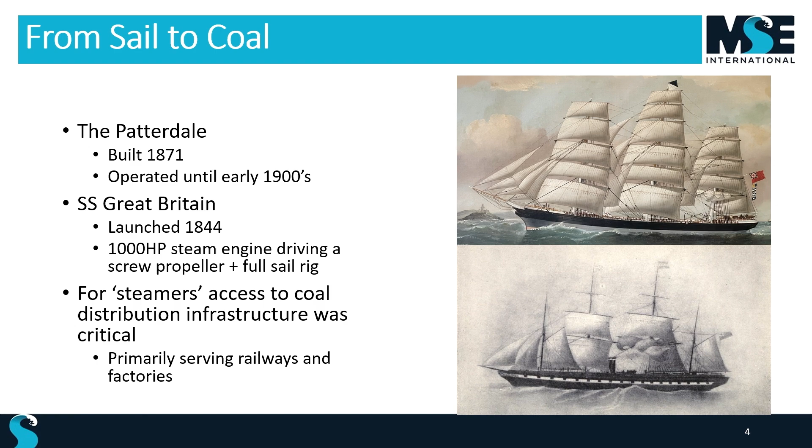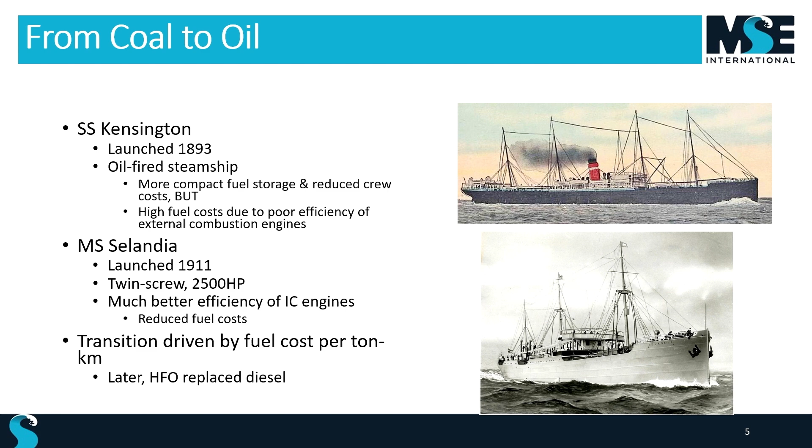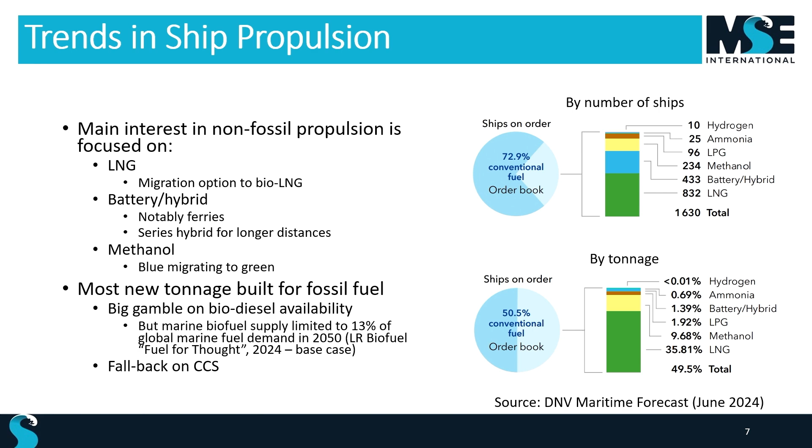But the grey on the top, this bit here, is actually the ships which DNV reckons will have to install carbon capture, because they will be the ones that I've mentioned in the previous slide. They're on order now. They're going to have those ships. They're going to want to use them. So they're going to use them by putting in carbon capture and storage. And we'll look at what that entails in a moment.

This green bit is the biofuel bit. And as you can see, it's quite limited, and it doesn't last long because better solutions appear. As biofuels get really expensive, as they will, you're looking at a better solution. And the bit in the middle here are the new fuels, so-called e-fuels, made from renewable energy, or using renewable energy, so inherently zero carbon, but currently extremely expensive and probably always quite expensive.

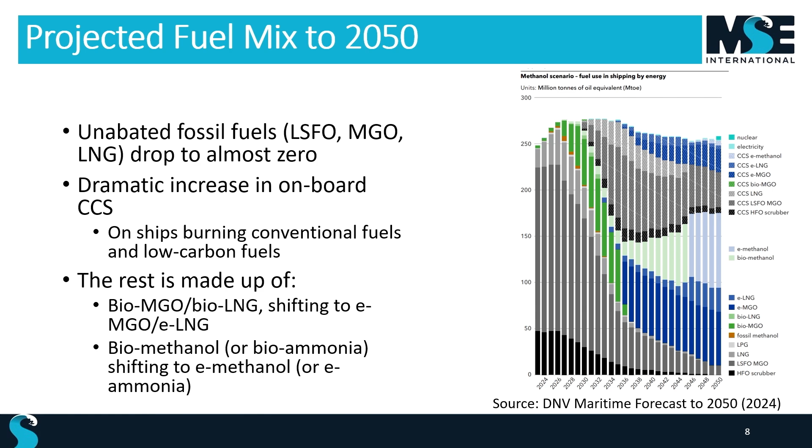Now the biofuel bit needs a little bit more scrutiny, and this is because you never quite know where it's coming from. So if you're buying biofuel from, let's say, Indonesia, how do you know that has been properly generated, as opposed to someone chopping down a tropical rainforest and planting palm oil to make some biofuel and a quick buck? You need to know that, because chopping down a tropical rainforest and planting palm oil is massively damaging. It's massively negative from a carbon perspective. So this really would be a massive disaster if this happened at scale.

So we have this chain of custody which essentially tries to keep track on where the biofuel is coming from, how it's moved around, how it's distributed, and where it's used. So that's a long way of saying we've got to really police this very carefully. And I'm very skeptical, because we know from the fishing sector how easy it is to falsify the paperwork. And I think this could turn into an unmitigated disaster if we're not very careful. So treat with caution, I think, would be my message on that.

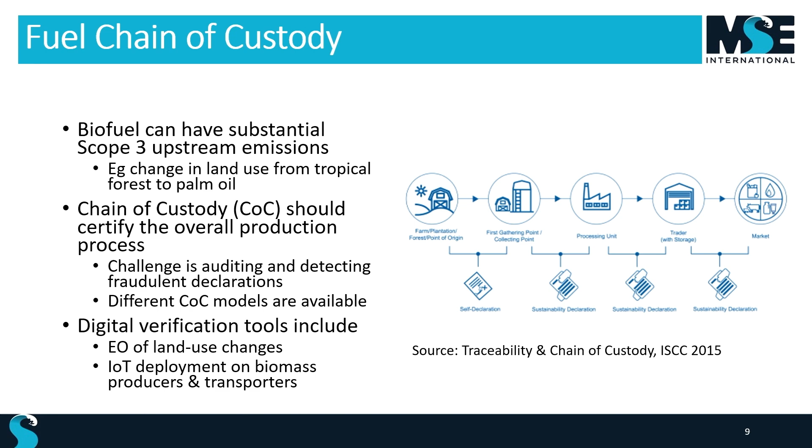Now, coming on to the other option, which is the onboard carbon capture and storage. Just a little bit of word about what this is. So on the ship here, what you've got is the conventional engine, and it discharges its flue up through the funnel here. And what you do is you divert the flue gas before it is discharged, and you absorb the carbon in a chemical carrier, which will absorb carbon, and then you process the chemical carrier to release the carbon, and then you liquefy it to go into this storage tank on the vessel.

When the vessel gets into port, you take the carbon dioxide from the tank, you offload it, you do something clever with it in the port to store it. You then have to distribute the carbon dioxide, and people are looking at re-injecting it and so on.

The problem with it, and it's a big problem, is that it's an incredibly inefficient process. If you just look at the amount of fuel you have to burn to drive the carbon capture, it's about 40% of what the vessel is burning anyway. So this is a massive cost overhead. Then you've got to factor in the fact that the process only absorbs about 80% of the carbon anyway. And suddenly you realise, actually, we're spending all this money and we're gaining a very small advantage. So I think we're fairly sceptical about this particular process.

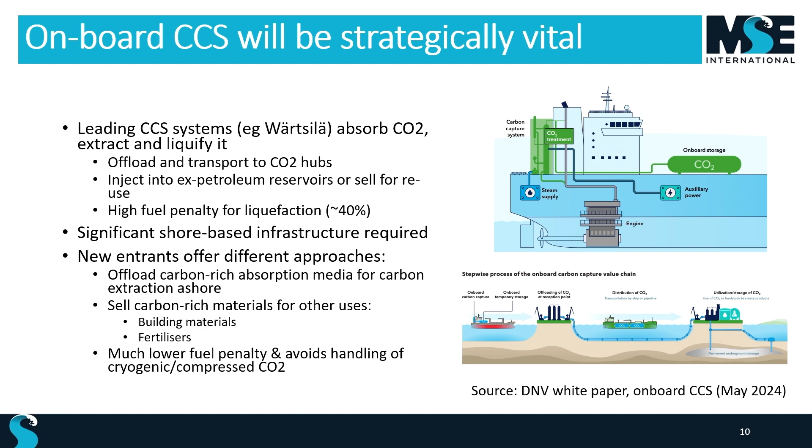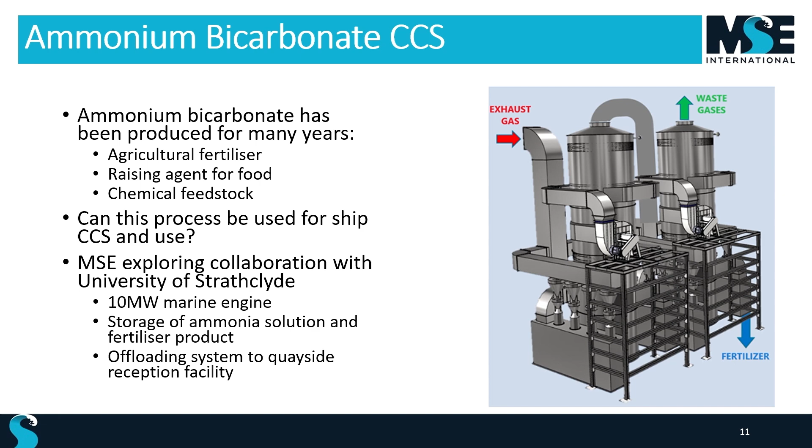But this seems to us to be an important technology because we have to have this carbon capture. Otherwise, half of the world fleet is going to be idle because they can't operate them. So there we are with the carbon capture.

The other big area which is interesting is the hybrid ship. These are ships which will have a small conventional engine, but most of the energy that's used by the ship when it's traveling between A and B is electric. And you simply use the small engine to effectively extend the range of the ship, because it can't do the whole journey on electric alone. The batteries are not big enough.

And this can save an enormous amount of carbon, depending a little bit on the route that the ship is operating on. But these technologies are advancing very rapidly, with some of the technologies around new materials making these motors much more efficient, everything that can all help to make the ship more efficient and therefore use less fuel.

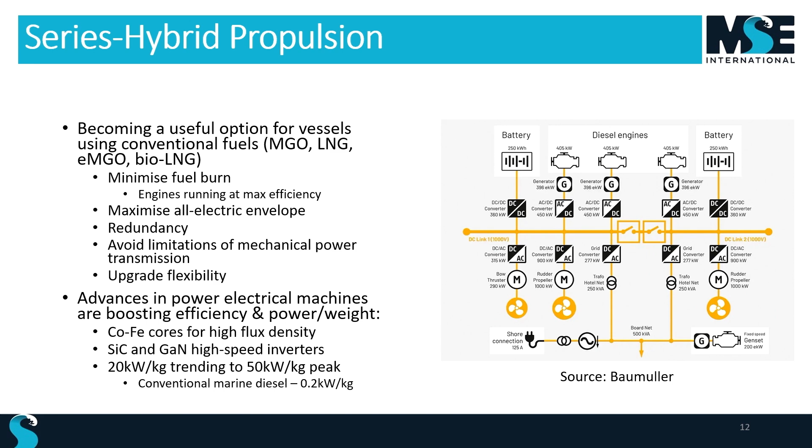And this pod contains an electric motor, and the company that we're talking to, Helix, developed their technology with the performance motorsport sector. Of course, if you're developing a car for motorsport, you've got to have a really good power to weight ratio. It's what makes the car a winner or not. And so they're expert in this. And what they're starting to do now is to marinize that technology so it can go into this sort of drive. So you've got the electric motor, normally a gearbox, and a propeller on the end.

And the big game changer with this particular technology is this compact size. When you've got a ship or indeed any other object passing through the water, drag is a big factor. It's the drag which governs how much power the vessel needs to propel it, which in turn governs how much fuel you need to burn. And these podded drives with very efficient motors in them have a very small cross-sectional area. So the drag on this podded drive will be a lot lower than on a conventional one.

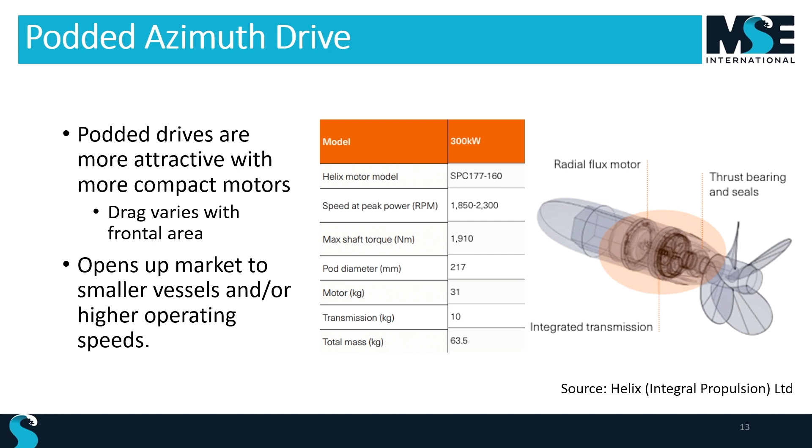And one of the companies we work with, the naval architects that we work with and have been for many, many years, is a company called Houlder. Again, some of you may have come across it. They have a base in Portsmouth and also in London. They designed this vessel originally. This is a conventionally fueled vessel at the moment. It runs on diesel fuel.

And what we did with them, we asked them to redesign the vessel as if the client had said, make this electric. What would the vessel come out like? Would it work? So that's what we did. And by the time we'd done the optimization, what they ended up with was some batteries on this vessel which would give it a 1 hour endurance, a lot more. I mean, it takes about 12 minutes, I think, to do the crossing from Gosport to Portsmouth. So you've got a lot of leeway in there.

And interestingly, for this particular exercise, we were using something called a flow battery. And a flow battery is different from the average battery that you will all be familiar with, in the sense that it has a liquid which you can pump around the battery, and that takes the place of the solid material inside a conventional battery.

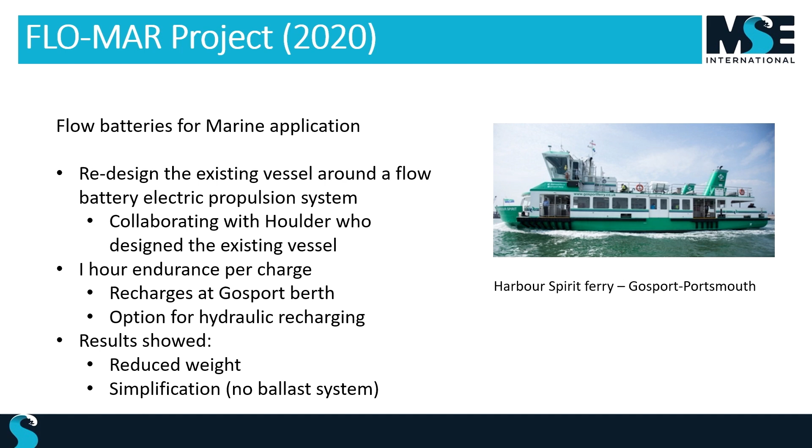And the reason for that is that they didn't consider one of the most important drivers of price reduction, which is that as things get cheaper, more and more people can use them. So haulage companies suddenly realize, batteries are cheap enough now, we can use them on trucks. Mining companies said, we can use batteries on this, that and the other. So suddenly the market mushrooms. And with that you get a load of investment coming in, which means that the rate at which the price can come down accelerates. And so that has really transformed the situation.

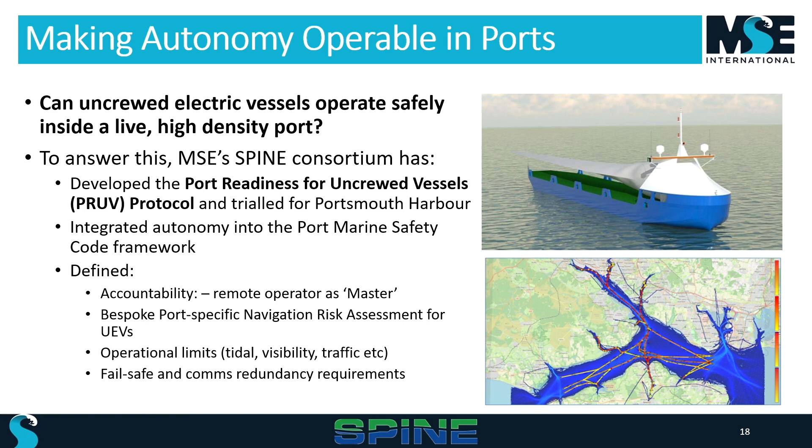But we have taken this forward, and we've developed a protocol for ports to use so they can support autonomous vessels. And this is just some work to look at risk assessment in the very crowded Solent. I mean, if you can do something autonomous in the Solent, you can do it anywhere because it's the most crowded waterway in the world. So a good testing ground for us. So all interesting stuff.

The sort of vessels which we think could use this: the ferry market, not necessarily with full autonomy, but with some automation, so it can be integrated with how much energy it's going to need when it gets to port, which the port obviously needs to know. So that could be very handy.

Survey vessels. As some of you may know, we're having to do more and more surveying. Every time you build an offshore wind farm, you have to do a load of surveys to prove that your wind farm isn't causing environmental damage. And so you do a survey before you build the thing, and then you have to do regular surveys every year while it's operational, so you can confirm that no untoward impact has been caused. That's very expensive using conventional survey vessels.

So the next generation will be autonomous, which will go backwards, a bit like mowing the lawn. You go backwards and forwards over your area of interest, collecting all the data you need, and that will reduce costs enormously. So there are some particular vessel types which we think are suitable for this and will be the pioneers. And we want the Solent to be on the leading edge on that. So we're working on a number of projects to demonstrate these sorts of vessels.

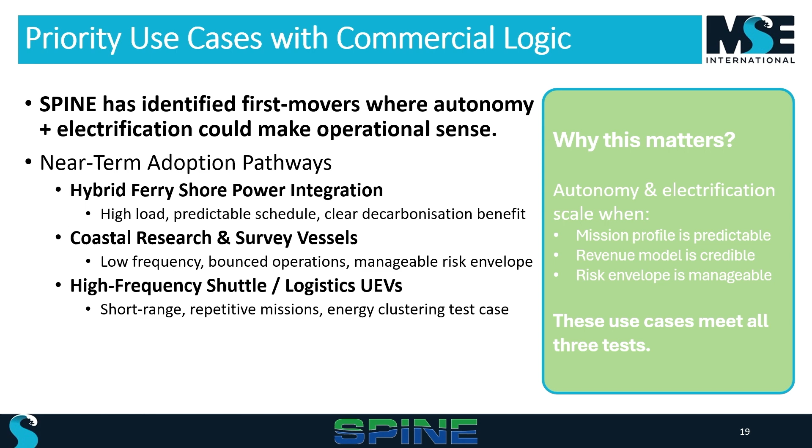But the final thing I wanted to touch on now really is what happens in port. And this is just the last few slides before I close.

Clearly, if you've got an electric vessel, it's got a load of batteries on board, you've got to recharge them. And that happens in port, obviously. And so ships will connect up to electricity supplies in the port. And equally, even non-electric ships will have to connect up because they've still got, let's say, a cross-channel ferry. It's got loads of air conditioning to keep the passengers happy. And that has to be powered somehow.

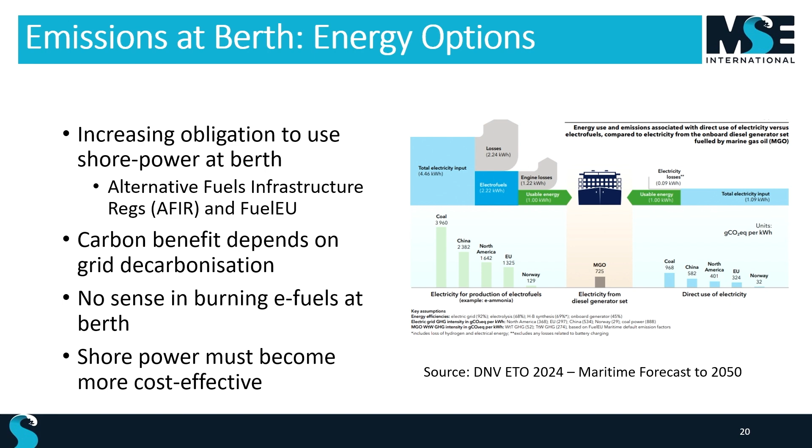Making this pay, because of course the ship operator doesn't want to be paying high electricity prices, and so the question is, well, what does the port do about that? How do they sell electricity to a ship profitably? And it's extremely difficult, because as we all know from our electricity bills, we have to pay a lot per kilowatt hour of energy that we use, and the same is true for ports. A lot more than the ship would have to pay if it was using its own generators.

So there's a massive incentive for the ship operator to surreptitiously use means of getting power without having to pay the high price of grid electricity in the UK at the moment. But batteries come to our rescue again. And the reason is, this is just a little schematic of some work we're doing on the Isle of Wight with Cowes Harbour Commission, and other ports actually as well.

But the idea is that you have your grid connection, you have your various converters to turn it from AC into DC, direct current, and you have a battery. And what the battery does is it means that you don't have to pay... some of you may be on Octopus tariffs for your electricity. If you use electricity at a cheap time of day, you could pay a very small price for it.

And what the battery does is it means that the port can take advantage of that same mechanism. So they can buy their electricity when it's maybe 5 pence a kilowatt hour. They can store it, and then when the vessel comes alongside and needs power, which might be at 5 in the afternoon when electricity prices are very high, you can simply provide the electricity from the battery.

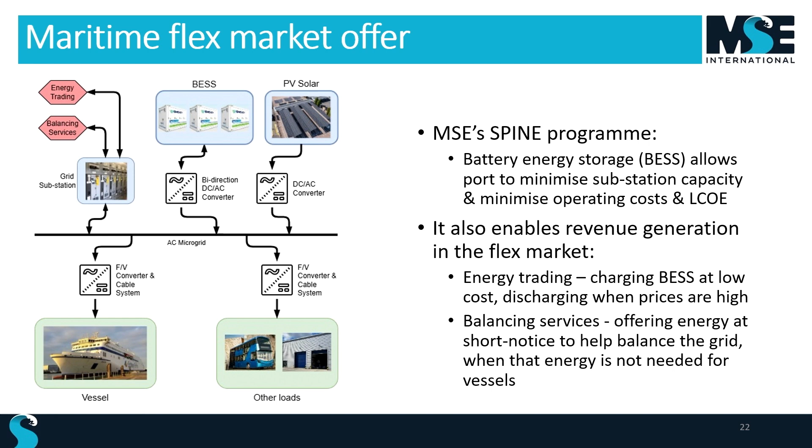It's always the way. And the really interesting bit is what happens over here when we get clever and we can start selling these services back to the grid. That's when we can really make these systems work economically. And we're on the case. That will happen. So, conclusion.

One of the important lessons from both history and indeed today is that infrastructure, and particularly energy distribution infrastructure, is absolutely crucial. And if you think back to when ships moved to coal, the only reason that they could do that was because the railways had already got the infrastructure to distribute coal all around the country. And of course railways in those days burnt coal, so they were absolutely instrumental in the shipping sector suddenly waking up and saying, oh, we've got all this coal, we could use that. So they piggybacked on the railways effectively to make that transition to coal. And the same is going to happen this time round. It's all going to depend on infrastructure.

We don't have a hydrogen infrastructure at the moment, which is one of the reasons why hydrogen hasn't really happened to the extent that people thought it was going to. It's infrastructure which was holding it back and still is holding it back today. And probably that ship has sailed, if you'll pardon the pun, because electricity and battery storage is now becoming so dominant that I think hydrogen has probably missed the boat.

I think the other factor which is becoming clear, and I've already sort of said it in the last few moments really, is that we're becoming much more interdependent with other sectors. Certainly in terms of getting that scale, all that battery price reduction, that's becoming possible because other sectors are also needing those batteries. But we're also competing for resources.

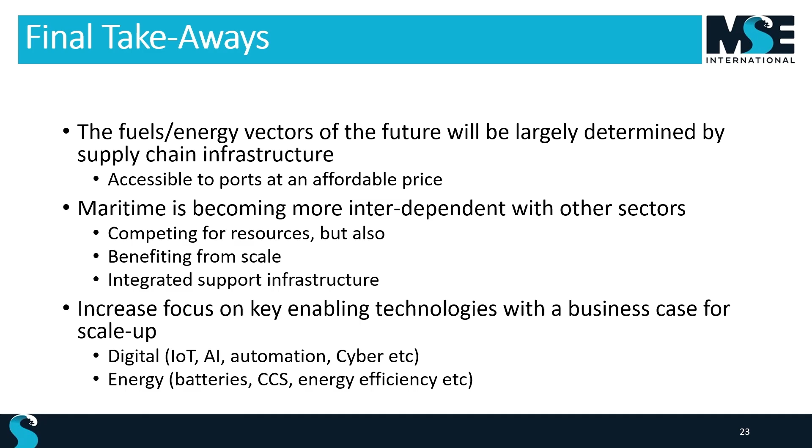Happy to answer any questions.